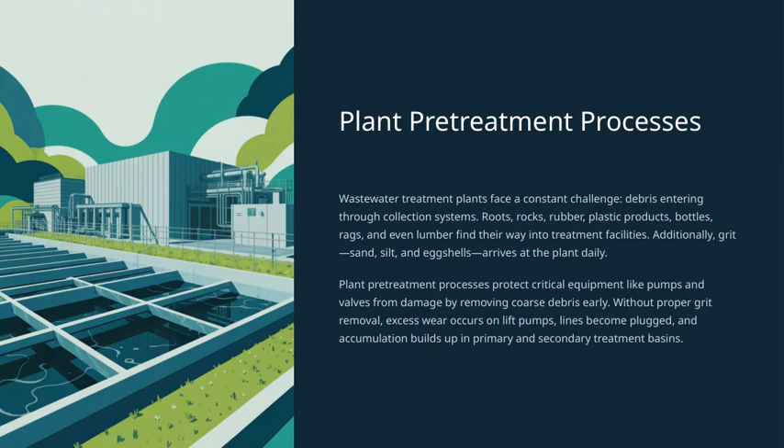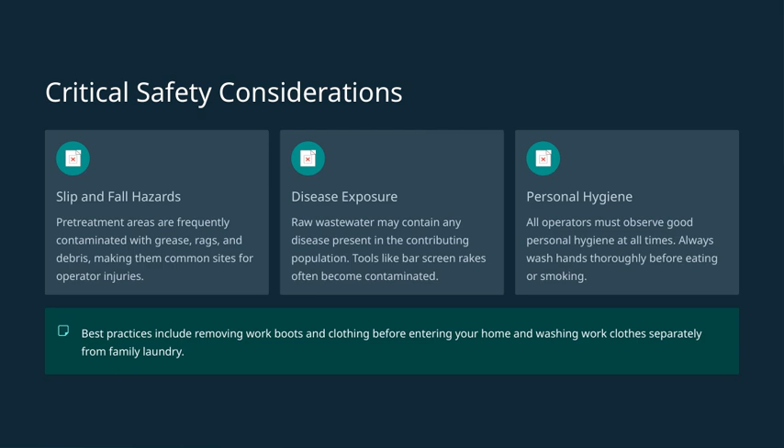A best practice is to remove work boots and clothing before entering your home, and to wash work clothes separately from your family laundry. By paying attention to these safety points, we protect ourselves and ensure the safety of everyone around us. This fits into the overall theme of maintaining a safe and healthy work environment.

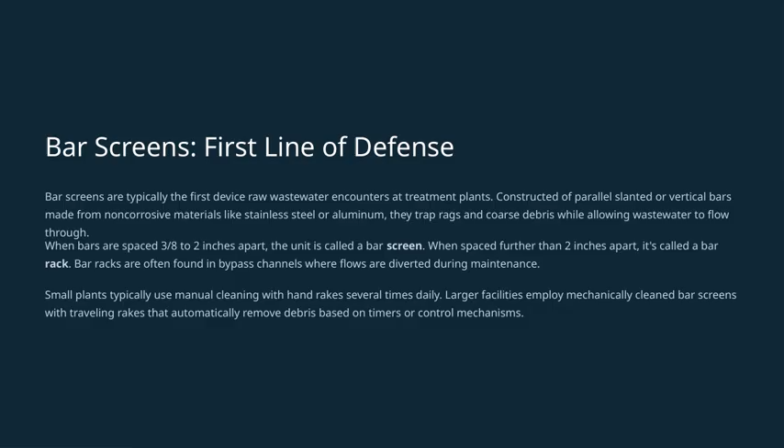Small treatment plants usually rely on manual cleaning, where operators use hand rakes several times a day to remove debris. On the other hand, larger facilities use mechanically cleaned bar screens equipped with traveling rakes that automatically remove debris, often based on timers or control systems. Overall, these devices are crucial because they help protect downstream equipment and processes by removing the larger solids early on. They really form the first essential step in ensuring the efficiency and effectiveness of the entire treatment process.

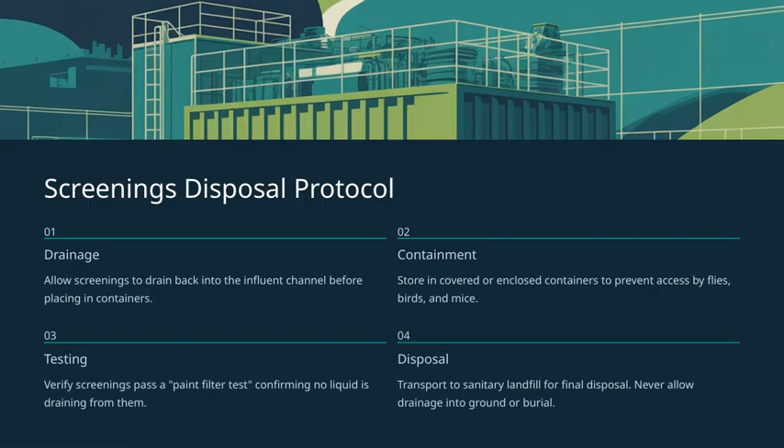Connecting all these points, following this protocol helps us manage screenings responsibly, protecting both the environment and public health, and aligns with our overall goal of sustainable wastewater treatment.

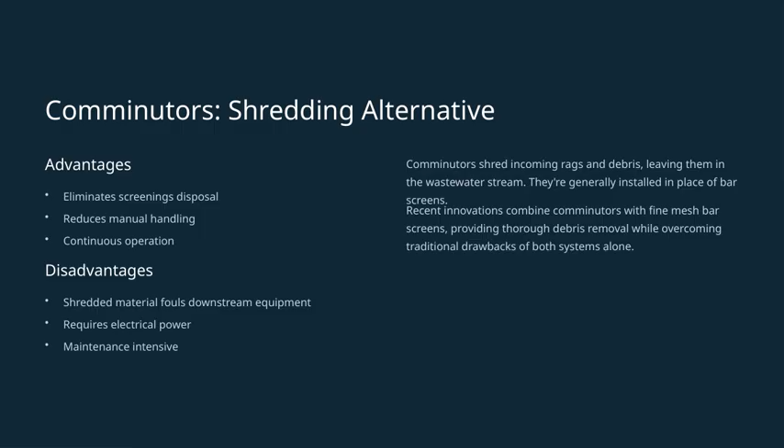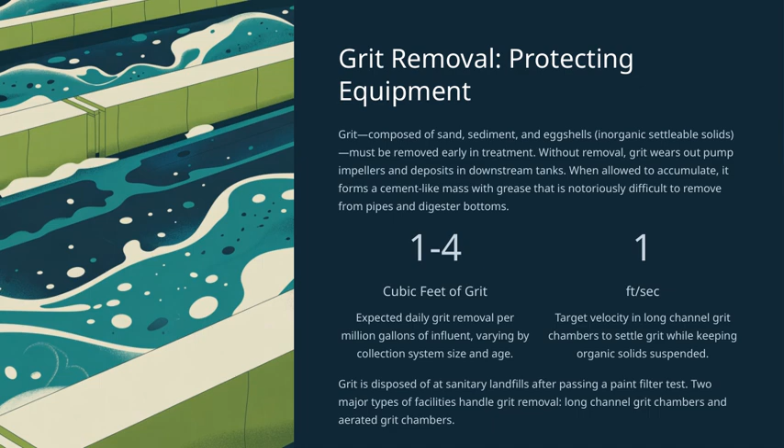Finally, there are two main types of facilities that handle grit removal: long-channel grit chambers and aerated grit chambers. Each has its own advantages, but both serve the critical purpose of protecting the downstream equipment and maintaining the overall health of the treatment process.

Let's take a closer look at grit removal technologies, which are essential for protecting downstream equipment and preventing buildup issues in wastewater treatment plants. There are two main types we typically use: long-channel grit chambers and aerated grit chambers. Each has its own design principles, operational methods, and maintenance needs, and choosing the right one depends on your plant's specific requirements.

Starting with long-channel grit chambers, these are designed to keep a steady water velocity, usually around 1 foot per second or 0.3 meters per second, regardless of flow variations. This steady flow allows heavier inorganic particles like sand, gravel, or eggshells to settle out, while lighter organic solids stay suspended. These chambers often have a parabolic, rectangular, or U-shaped cross-section to help maintain uniform flow, even when flow rates fluctuate.

In terms of operation, wastewater flows through the chamber, and the grit settles at the bottom. Mechanical systems, such as chain-and-flight collectors, screw conveyors, or clam-shell buckets, are used to continually or periodically remove the grit. The main advantages here are the simple design, low energy use, and robustness, which helps them handle shock loads effectively.

However, they do require a larger footprint, and maintaining the optimal velocity can be tricky when flow varies a lot, sometimes leading to organic buildup. This can cause odor issues and raise disposal costs. Regular inspection of the removal mechanisms and periodic cleaning of the channel are essential, and odor control measures might be necessary, especially in warmer weather.

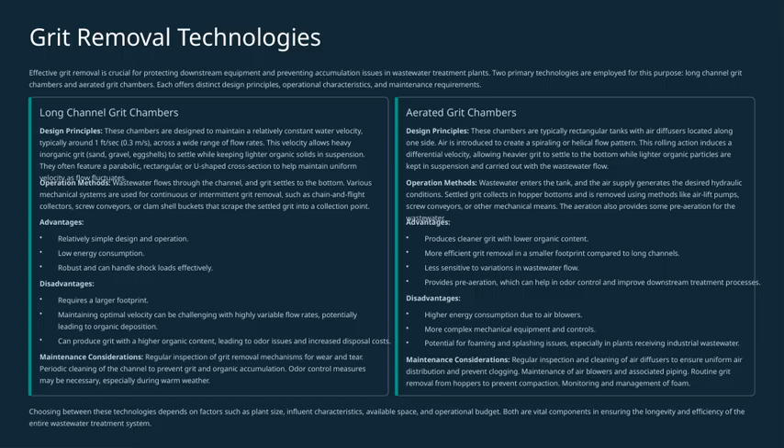In the end, the choice between these two technologies depends on factors like plant size, influent characteristics, available space, and budget. Both are crucial for ensuring the longevity and efficiency of your wastewater treatment system.

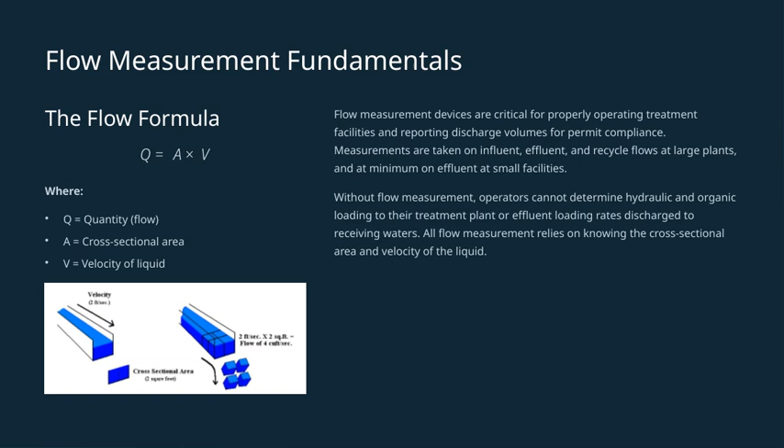Without these measurements, operators wouldn't be able to determine important things like hydraulic loading, organic loading, or the amount of effluent being discharged into receiving waters. It all hinges on knowing two main things: the cross-sectional area and the velocity of the liquid. These measurements form the basis for understanding and managing flows effectively, which is vital for environmental compliance and treatment efficiency.

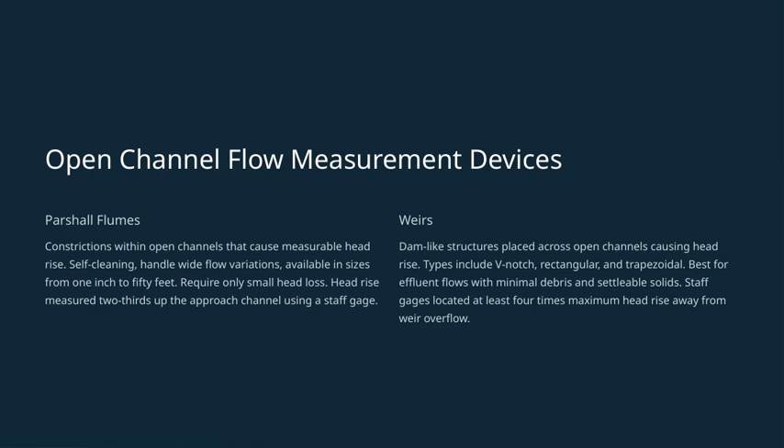with accurate measurement. When measuring head rise over a weir, it's important to place staff gauges at least 4 times the maximum head rise away from the overflow point. This ensures accurate readings and reliable flow measurements. Both Parshall flumes and weirs are essential tools in open channel flow measurement, helping us monitor and manage water flow efficiently across various settings. Let's take a closer look at flow measurement in pumping systems.

Starting with Venturi and magnetic meters, these are commonly used to measure liquid velocity inside pipes. By combining this velocity measurement with the pipe's diameter and the flow equation, Q equals A times V, we can accurately determine the flow rate. It's important to remember that for these measurements to be accurate, the pipes need to remain constantly full.

Next, there's the tank volume method. This approach establishes flow by either filling or emptying a tank of a known volume. By measuring the time it takes to pump that volume, say 1,000 gallons in 10 minutes, we can easily calculate flow in gallons per minute. This method is straightforward and useful for certain applications.

Moving on to transmitters and readout devices, primary devices give us instant readings, which are critical for real-time monitoring. For continuous recording or totalizing flows over time, ultrasonic, bubbler, or probe-level detectors are used. These are often paired with chart recorders or electronic totalizers to keep an ongoing record of flow data.

Lastly, let's review some common units of measurement. When we're talking about discharge or flow rate, units like millions of gallons per day, gallons per minute, or cubic feet per second are typical. For volume, we often use millions of gallons or acre-feet. Understanding these units helps us interpret data accurately across different systems and applications.